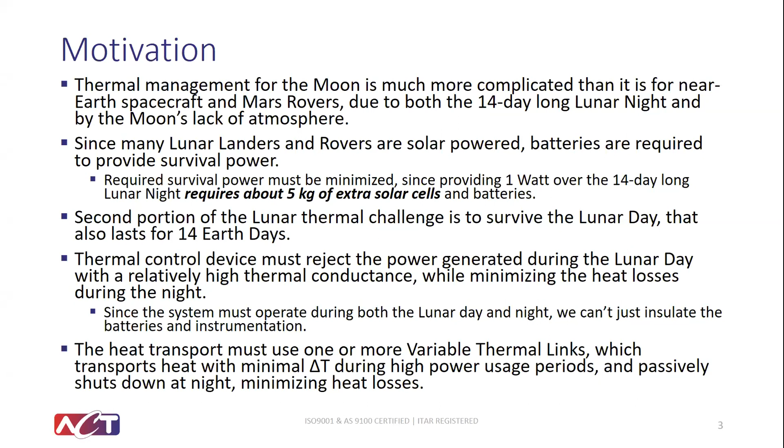Now, we're mostly dealing with developing lunar landers and rovers right now, which are solar powered. So during the 14-day long lunar night, you need battery power to keep everything warm. The problem is that 1 watt over 14 days requires about 5 kilograms of extra solar cells and batteries. So that's part of the challenge. The other challenge is to survive the lunar day. So what we want is variable thermal links that can easily allow you to reject the heat to a fairly hot sink during the lunar day, but then passively shut down and use minimal or hopefully no power during the lunar night.

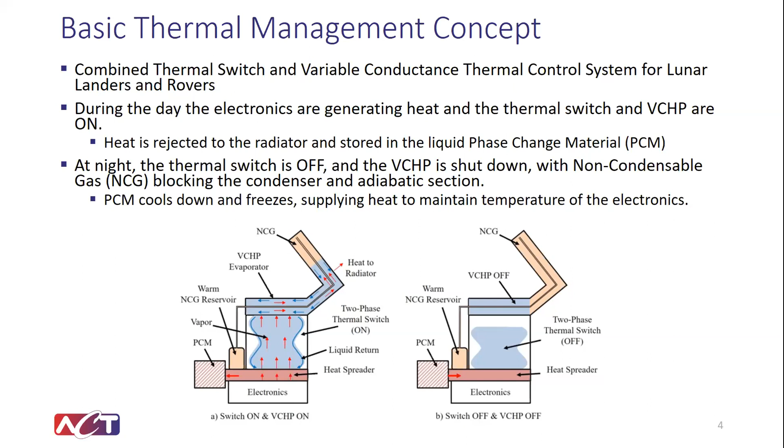This is just showing a very simple thermal management concept, showing pretty much everything thrown into one box. We have electronics that we're trying to keep cool during the day. So we have a thermal switch that activates. We have a variable conductance heat pipe that's also on, so we can easily reject heat to radiate heat away from the rover or lander. During the lunar night, the thermal switch decouples, and the variable conductance heat pipe also passively turns off, and so we minimize the amount of survival heat.

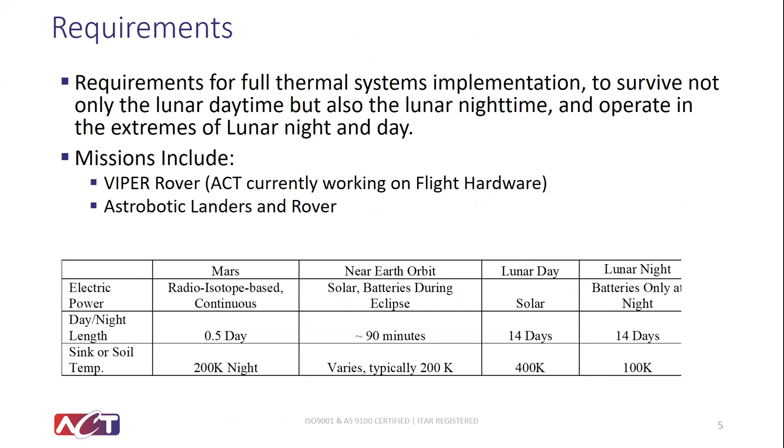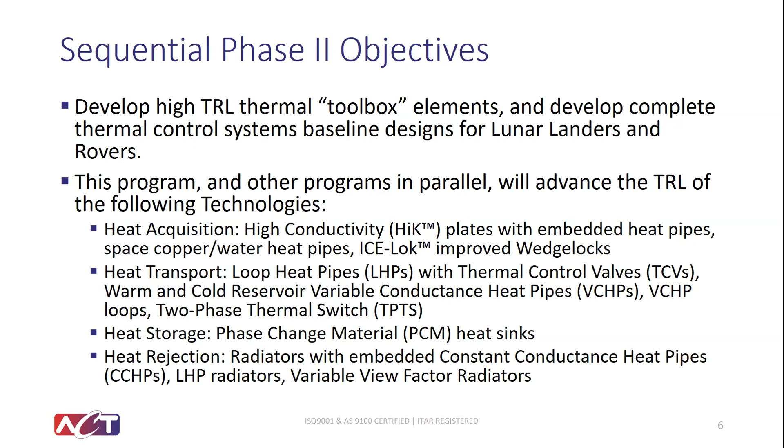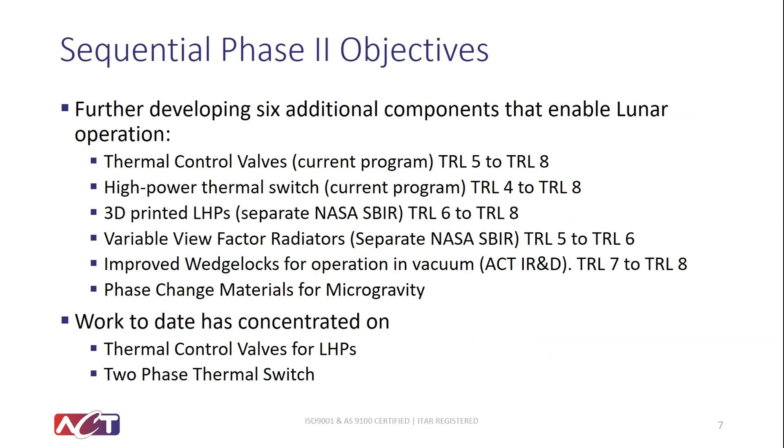Right now, on this program and in parallel, we're developing 6 additional components to enable lunar operation. The two things that we're doing on the current program are thermal control valves and a high power thermal switch. We'll describe both of those. We also have been working on several others: 3D printed loop heat pipes, variable view factor radiators, improved wedge locks, and phase change materials for microgravity.

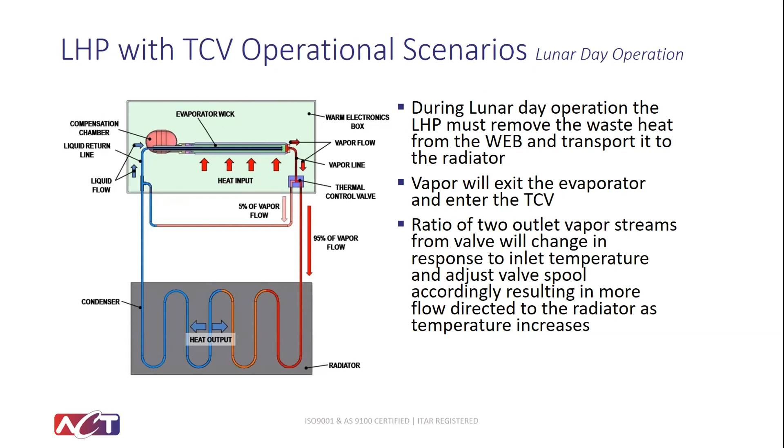During the lunar night, the thermal control valve directs almost all of the vapor flow coming from the evaporator directly back into the liquid line and the compensation chamber. And what happens is, for a loop heat pipe to operate, the evaporator pressure must be higher than the compensation chamber pressure to give you the force needed to drive the vapor and liquid around the system. If we short circuit it this way, basically the two pressures are essentially equal, and the system passively shuts off.

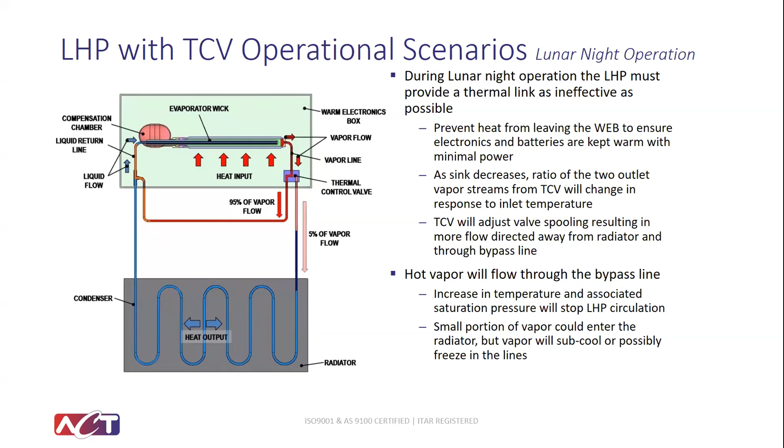So we have already demonstrated this type of system with a thermal control valve designed and manufactured by Pacific Design Technologies. I guess they're now Ametek. It's actually high TRL. It's currently used on several of the Mars Science Landers and several of the Mars rovers. It's a proportional valve, and it always has some liquid going either way. It works very well for that application. What we found when we built this was that it's somewhat overkill for our application. We really need only a simple on-off valve.

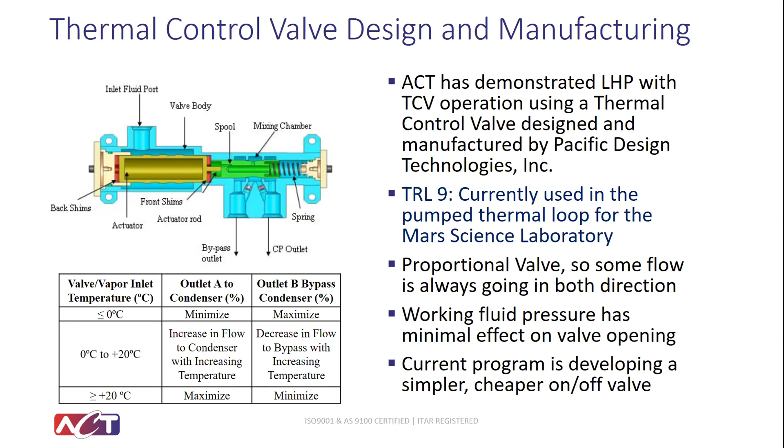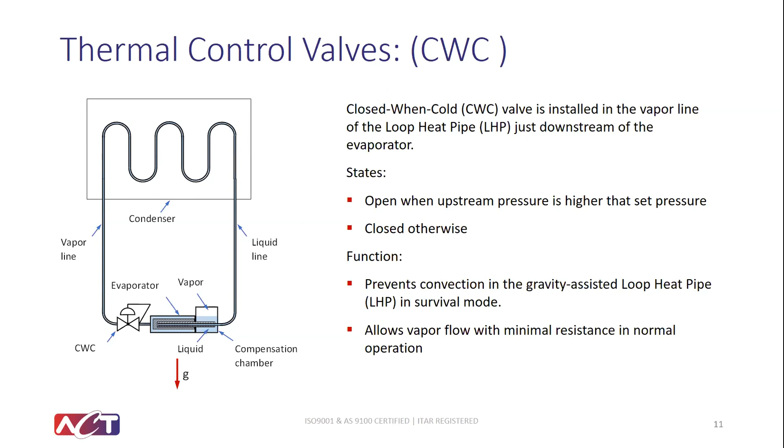So we have two different kinds of designs. One's a closed on cold valve that just sits in the system, and as the condenser temperature drops, it's going to start pulling down the evaporator temperature. But what happens is the closed on cold valve closes and prevents vapor flow from getting to the condenser. These are very good. We found these work well when we have a vertical orientation, with the radiator above the loop heat pipe evaporator.

We also have an open on cold design, and this is similar to the PDT valves in that when the system gets cold, the valve opens and short circuits the vapor flow right back to the compensation chamber. These tend to work a little bit better when you have a horizontal system.

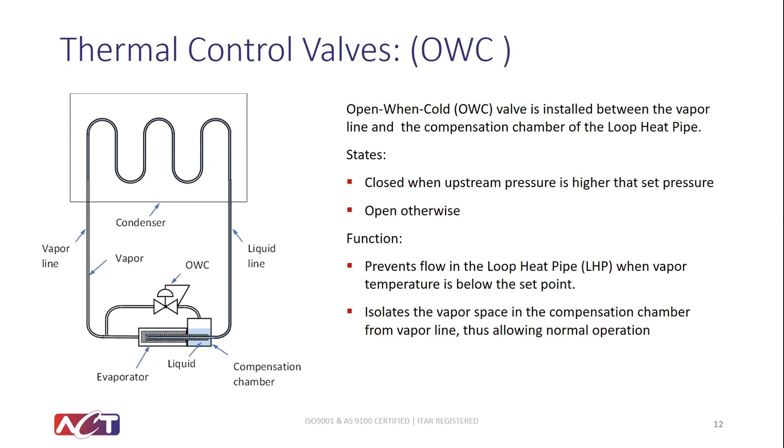Just showing our horizontal loop heat pipe test bed. We have the evaporator and compensation chamber on the left, and then we have a closed on cold valve, an open on cold valve, and a number of bypass valves, so that we can test one or the other, or just have the whole loop heat pipe operating without a thermal control valve at all. Compare the three different cases.

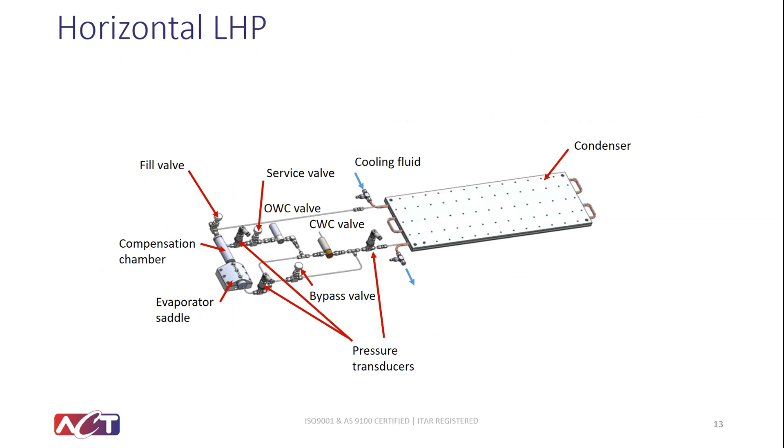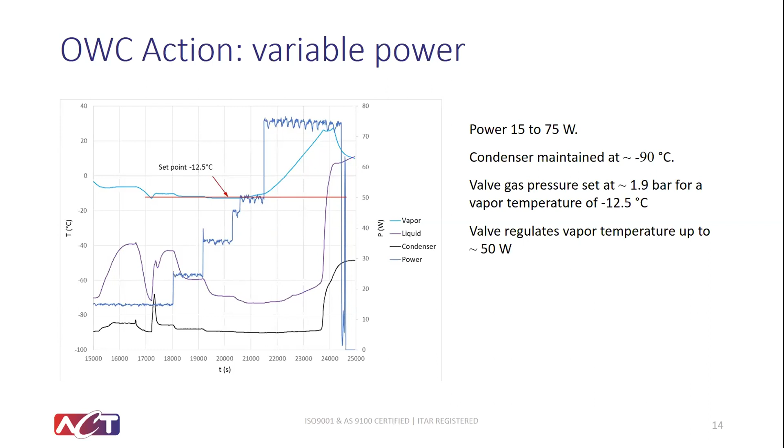We're also doing a series of endurance tests. We have a test rig set up where we have the valve set up so that we can manually cycle them on and off. So far, we've demonstrated roughly 4,500 cycles with some of these designs with no malfunctions.

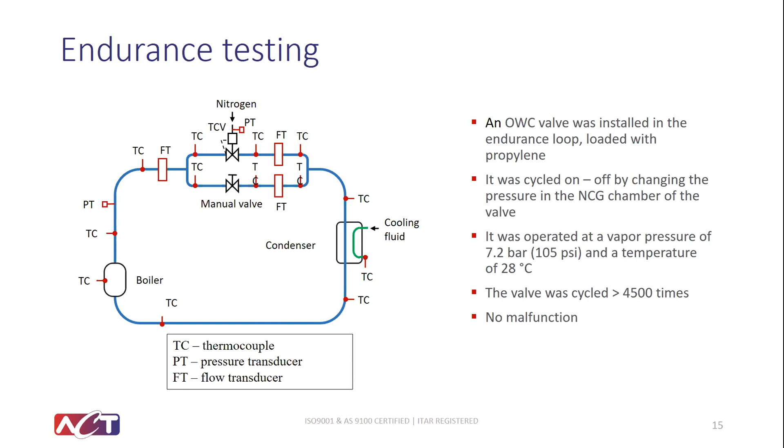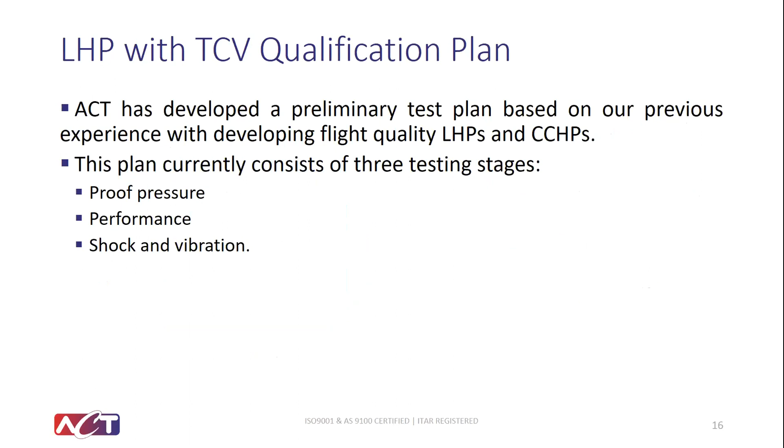We're now working to develop a preliminary test plan to qualify our new thermal control valves. There are three test stages: proof pressure, performance, and shock and vibration.

The other device we are developing now is what we call a two-phase thermal switch. Most thermal switches transfer heat by conduction, so you have something that is making and breaking contact, and you are conducting power through them. They're very good. They're used a lot in Mars rovers and all. But typically, they're designed to transfer like 1 watt of heat. What we want to develop, and are developing, is a two-phase thermal switch that can carry tens or hundreds of watts rather than just a watt or two.

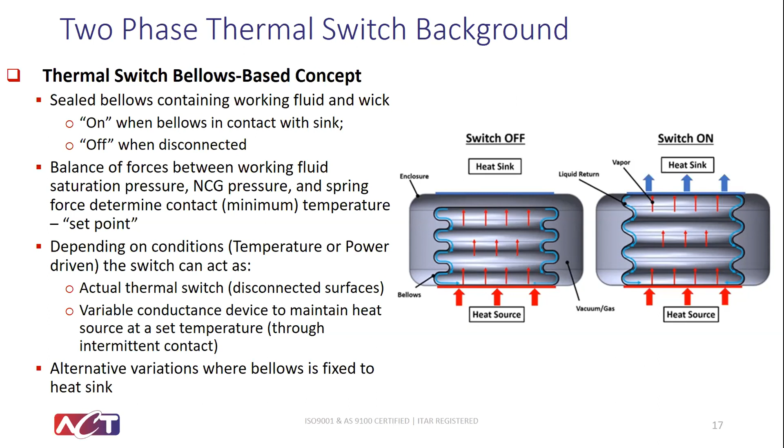So we have a sealed bellows with a working fluid inside and a wick that's not shown. When the power is low, the vapor pressure is low, so the bellows stays in a compressed position. As you start putting power into the system, you warm up, the vapor pressure increases with the temperature, and eventually the bellows will expand enough so that it will touch the heat sink and you can reject heat. We find it works in two different conditions: as an actual thermal switch, where when things get very cold, it disconnects, and as a variable conductance device, where if you're in a certain range, the bellows just oscillates back and forth and allows you to reject heat at a constant temperature.

So we've been conducting some initial tests. The thermal switch is shown in an open condition in the left photograph, and what we have done is attached an electrical resistance measurement, so that when the switch is on, the metal makes contact, you get a very low thermal resistance, and when the switch is off, the bellows retracts, and the thermal resistance goes higher. It's set by a resistor in parallel.

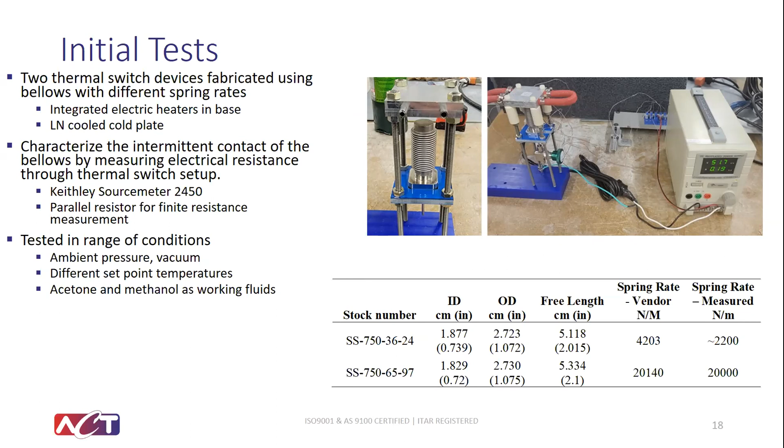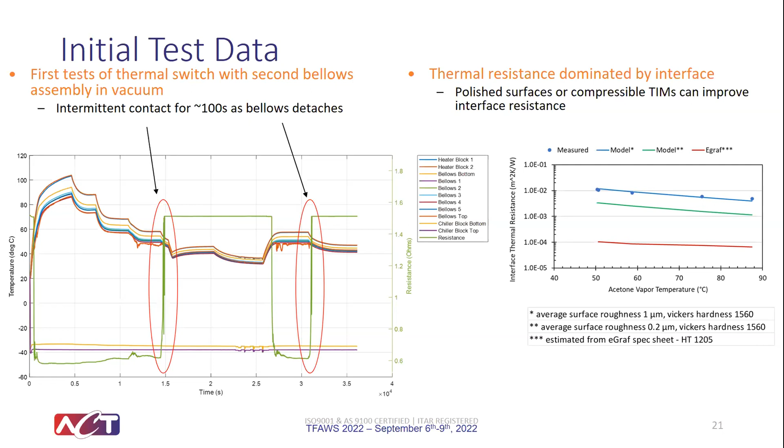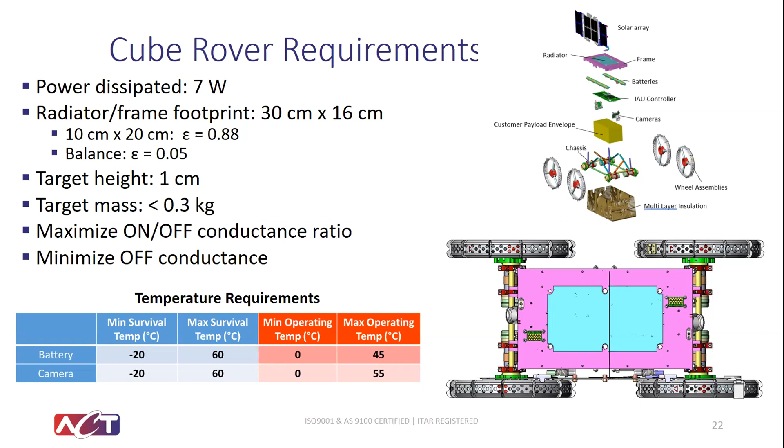Next slide. We're currently working with Astrobotic to develop a simple thermal switch device for a cube rover. This is a very, very tiny system, only about 10 centimeters by 20 centimeters is the typical dimensions. And we have something that will turn on or off depending on whether you're trying to dump heat or conserve heat. Next slide.

So this shows our basic design concept. Currently, the electronics are mounted on the heat collector plate. And what we've done is added a bellows thermal switch and a radiator above that to radiate when the bellows is connected and conserve heat when the bellows is not. We have very low conductivity standoffs, and we have a heat pipe spreader that helps spread the heat, but is also needed to add rigidity to the system when the bellows are pressing against that very thin face sheet. Next slide.

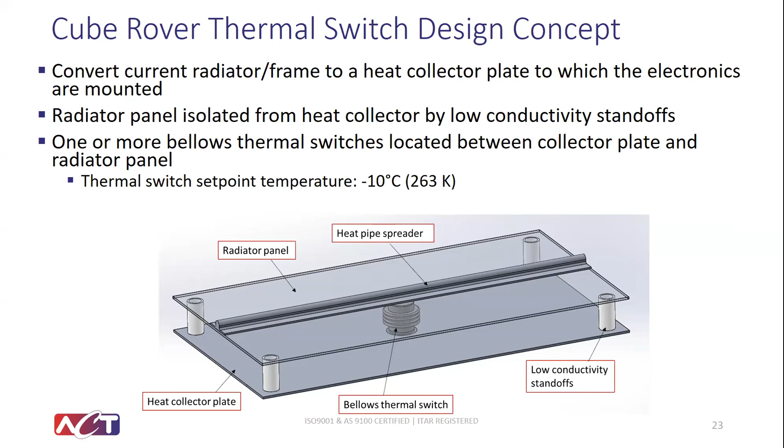Just showing our estimated on and off conductances, going from about half a watt per degree K when it's on, to somewhere between 10 to the -3 and 10 to the -4 watt per K when the system is off. And just showing the system setup here and the location of the systems, with a 7-watt case, we have a maximum temperature of 62 degrees during the lunar day, but then we can conserve heat during the lunar night. Next slide.

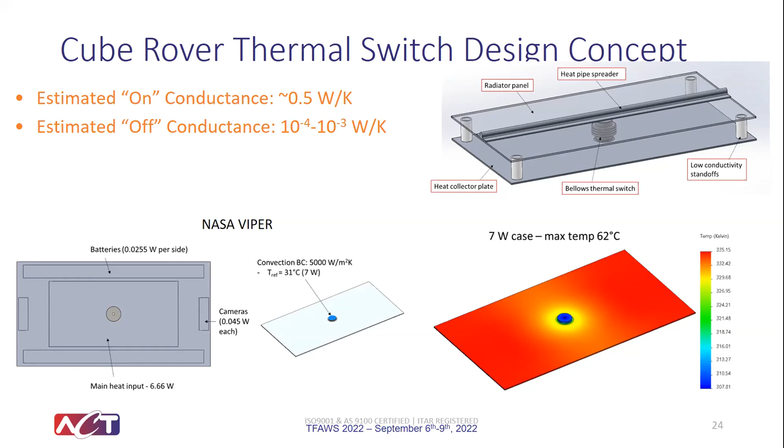We're also currently doing some work on another program, the NASA Viper rover, the Volatiles Investigating Polar Exploration Rover. It's a lunar rover tasked with investigating the southern polar ice cap for water ice. It's equipped with a large number of controllers, etc., and a drill to investigate the ice. And we are designing and fabricating the rover's thermal management system. Again, it has to be designed for the hot case when you're operating and trying to radiate all the power, and the cold case, which is effectively the lunar night.

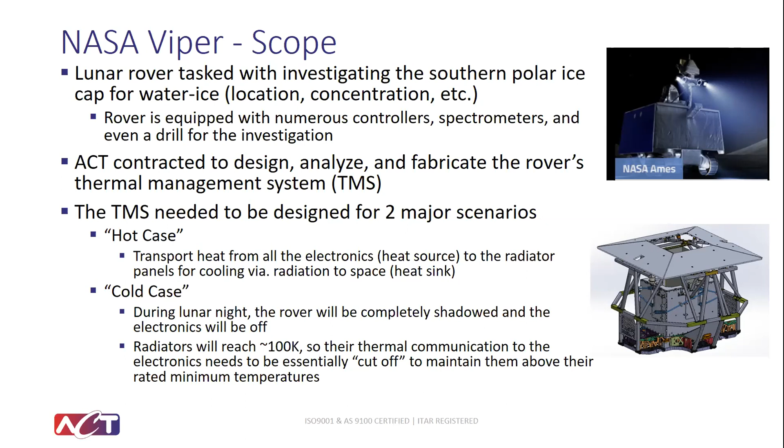This is actually not a true lunar night. Around the South Pole, you have mostly daylight, and this is more when we go into a cold crater for maybe an Earth day or so to drill for ice. Next.

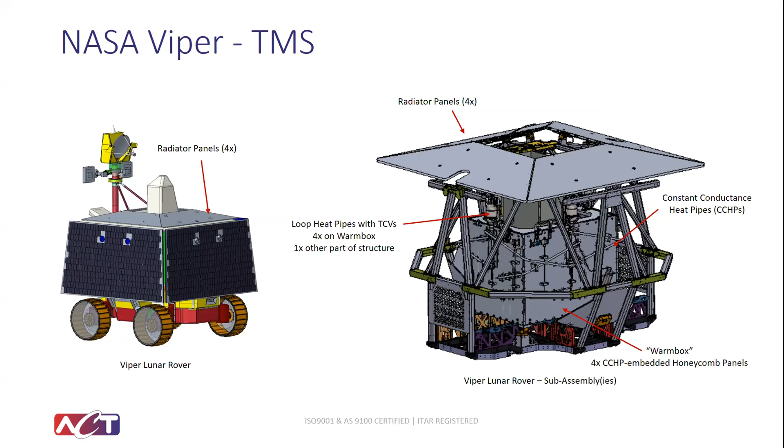This is just showing the Viper lunar rover with the rover to the left and the thermal control system to the right. We have radiator panels on the top, loop heat pipes with thermal control valves, and then there's a warm electronics box, that gray box at the bottom, and we have a series of constant conductance heat pipe embedded panels to transfer heat from the electronics to the loop heat pipe evaporators, and then the loop heat pipes transfer heat up to the radiator panels. Next.

So there are 5 loop heat pipes total in the NASA rover. They use propylene as the working fluid. They have thermal control valves, the Pacific Design Technology version, and the thermal control valves passively control the vapor flow, shutting it off during the lunar night and opening up during the lunar day. So it reduces the power loss via transport lines to single watts, which is very significant because, as I said before, every 1 watt of power is about 5 kilograms of batteries and solar cells.

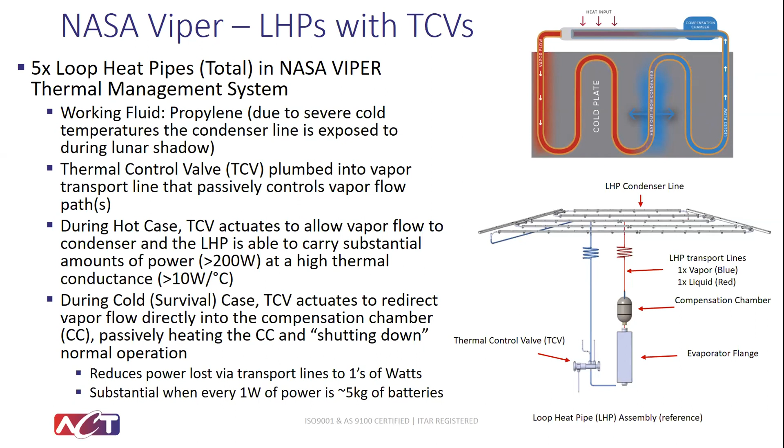Next. So future work on the NASA sequential program, we're developing rover thermal control valve systems and thermal switch systems at ACT, and we're fabricating and validating these test devices. Then we're going to work with Astrobotic to design a thermal control system for a lander mission, fabricate and test an engineering design unit, and do the same things for a small rover. And finally, we will build flight hardware for a NASA selected application.